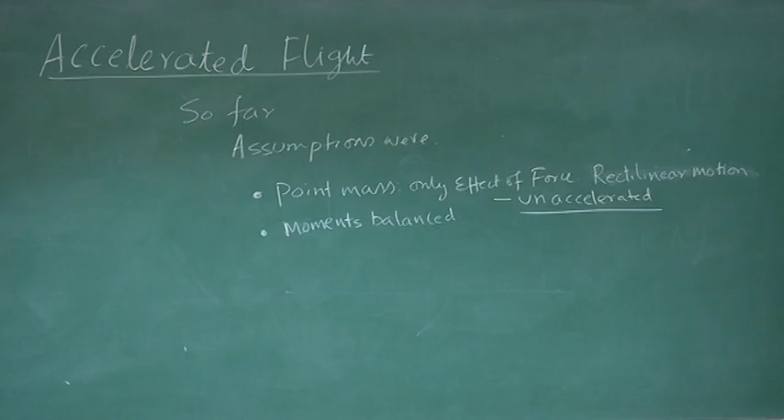Welcome back. We will be discussing now today a different type of flight regime.

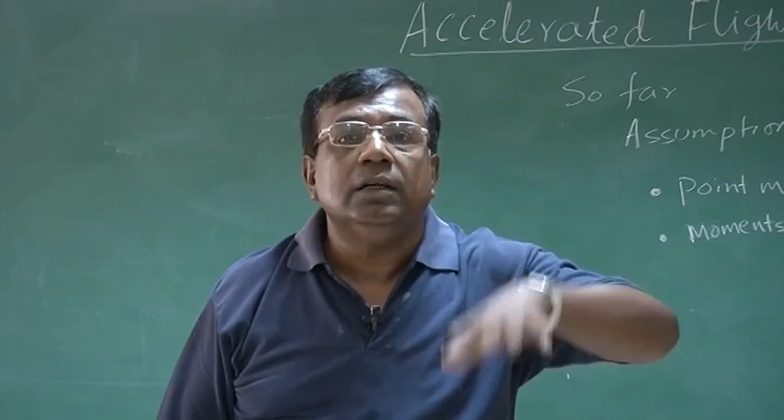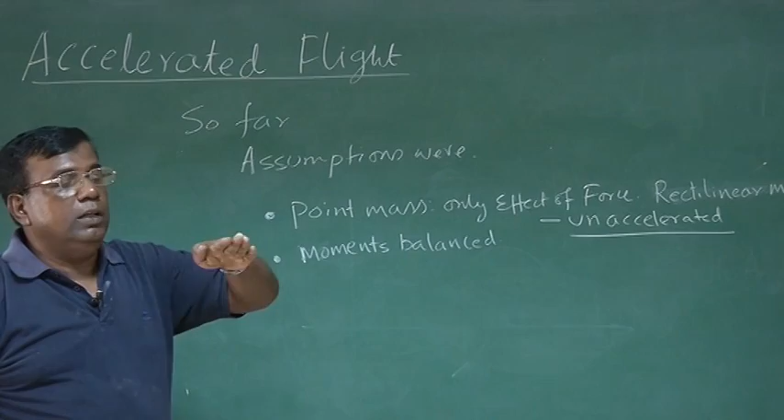So far, recall we were having assumptions. We are assuming the airplane to be a point mass. We are not bothered about the moment of inertia because we are not discussing the rotational property of the airplane. We are talking about cruise, climb, descent in rectilinear motion. We also assumed they are unaccelerated, that is, forces are balanced. There was an implicit assumption that moments are also balanced, so no such rotations are happening. In the second course you will know how moments are balanced, that's a different matter altogether. But these are the assumptions.

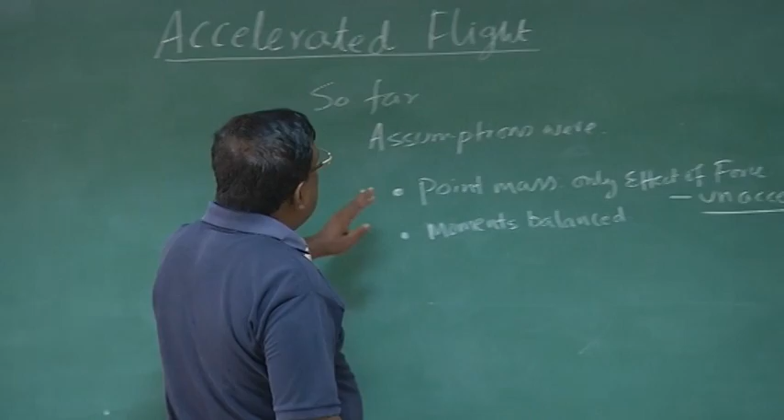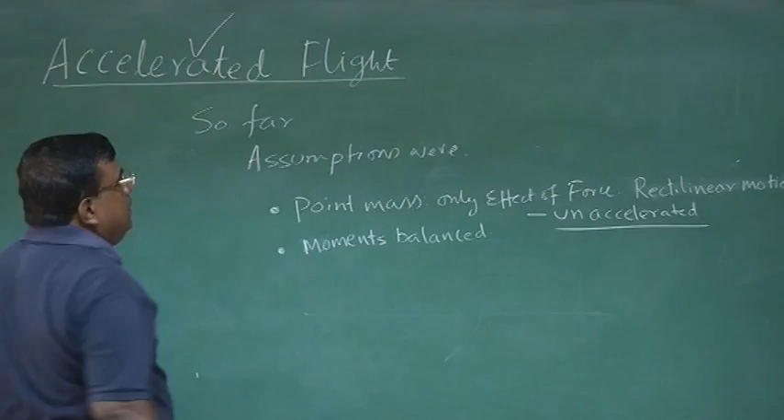Now we are going to relax one of these conditions. We still believe it will be point mass, however this time we will say it is accelerated flight. The assumption of rectilinear, unaccelerated motion is relaxed. So we will term this session under the title accelerated flight.

Whenever we think of an airplane, a young man will always think, I should be able to turn, I should roll like this. Like when you buy a motorcycle, you never think of only going straight, you think I should take a sharp turn, accelerate very fast, and that is the signature of youth. In aerospace, the adventure will always remain as long as aerospace keeps growing. This part of youth and adventure is an integral requirement to be a good aerospace engineer. So now we will talk about accelerated flight.

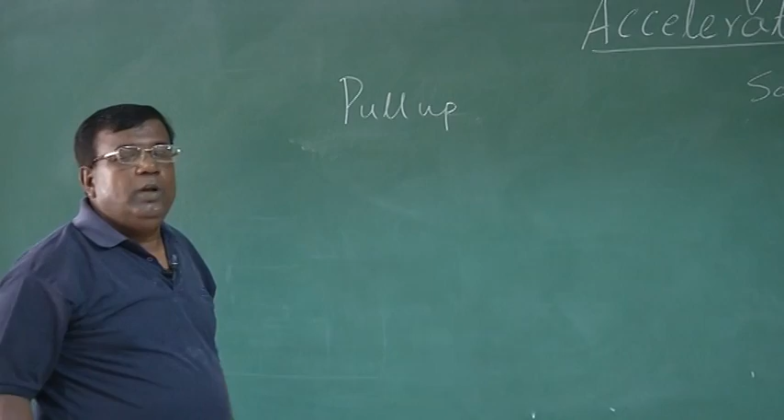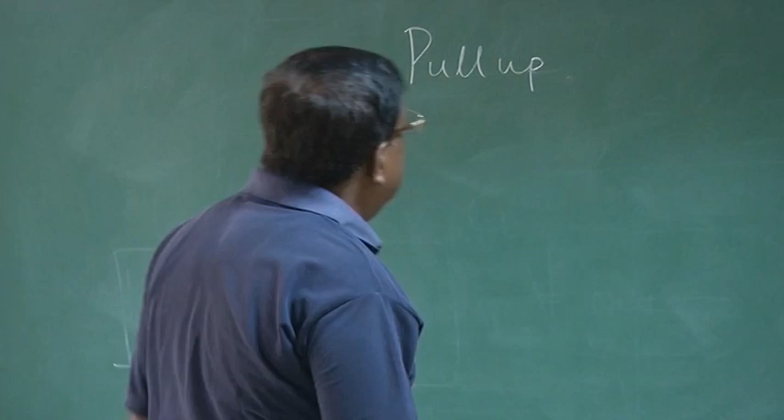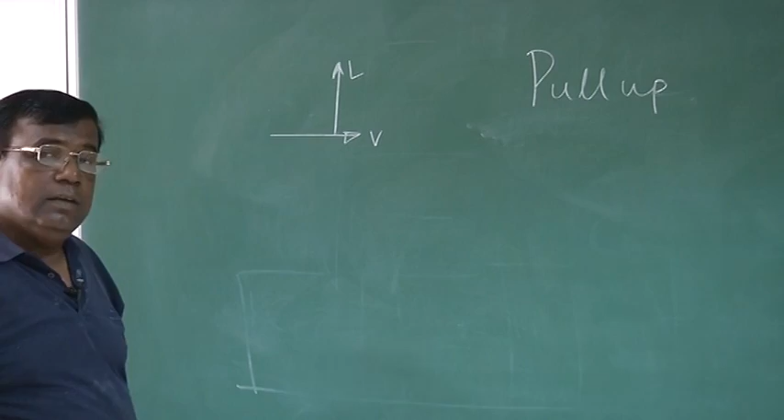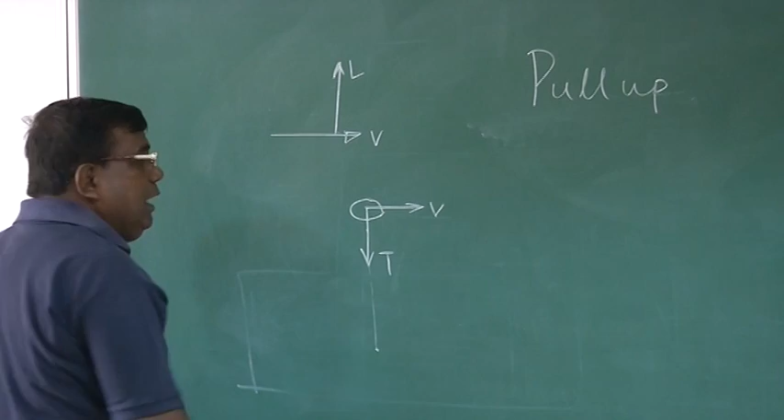Let us first discuss pull-up. What is typically a pull-up? Assume I am going like this, lift equal to weight, thrust equal to drag, and I suddenly increase the lift. What will happen? Lift is more than weight. Recall we agreed lift is perpendicular to velocity, that is how we defined lift. So if a body is moving in this direction and you pull it by a string under tension, what happens? It goes into a curved path, and this force is perpendicular to velocity.

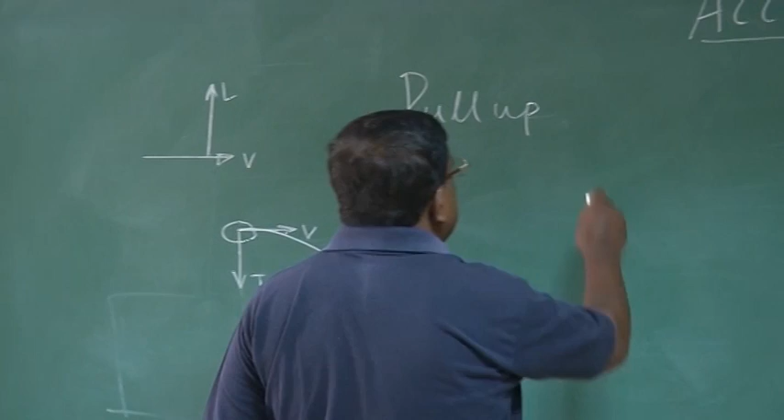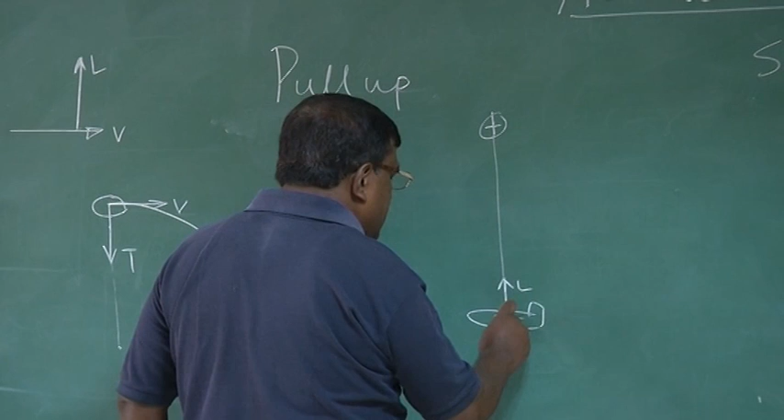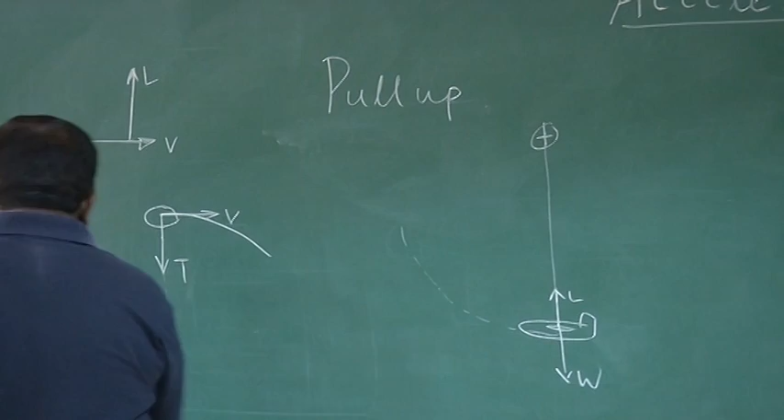This reminds you of centripetal acceleration. We will use that understanding to model a pull-up maneuver. So let me draw: this is the airplane, this is the lift, this is the weight. If you want it to go for a curved path, since it is going in a curved path, it is no more unaccelerated flight, it is accelerated flight. So if I draw this diagram and try to write the equation of motion, again assuming point mass, and of course assuming moments are balanced.

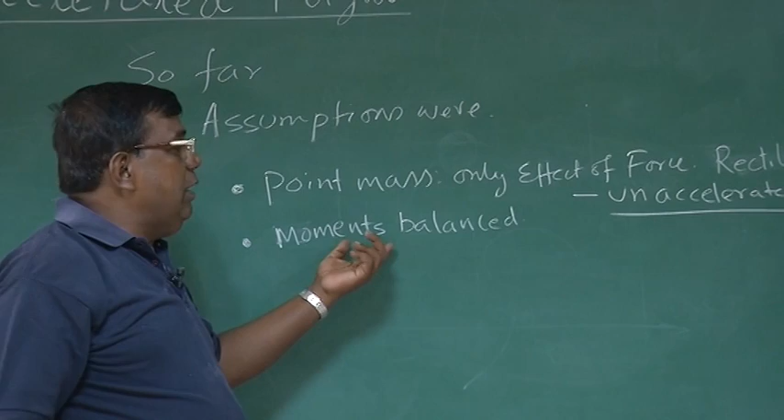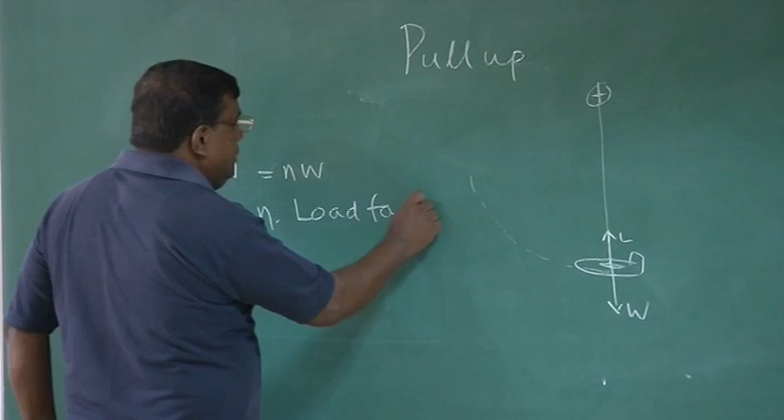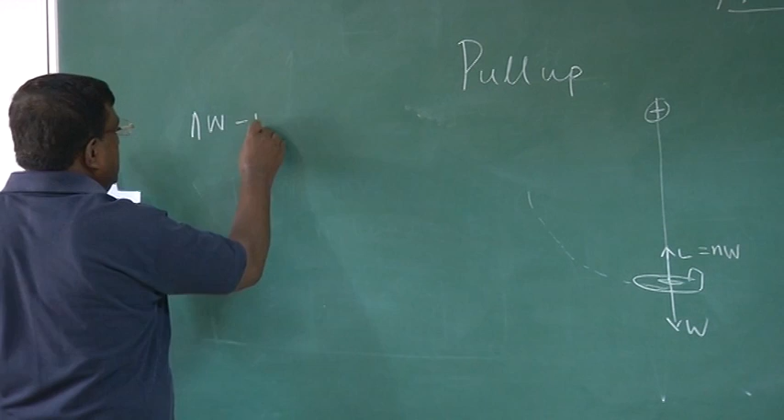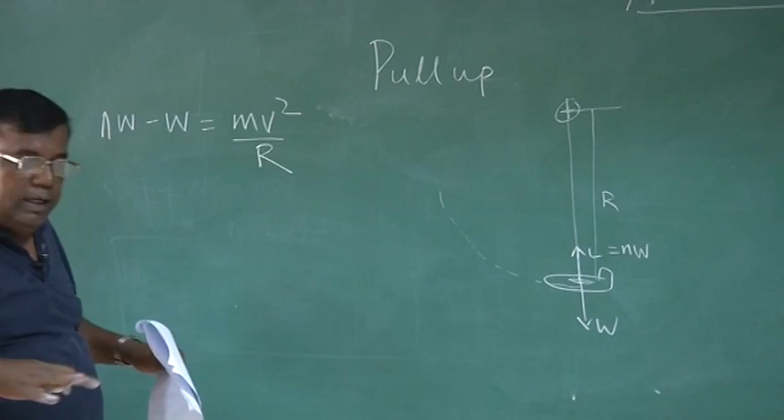So then I can write: lift, which is now not equal to weight, if it is going like this. So I write lift equal to N W, where N is the load factor, which is the ratio of lift to weight. So now lift is not equal to weight, lift equal to N W. So if I now write the equation: N W minus W will be equal to m v squared upon r, where r is the radius of turn, in a vertical plane, like this pull-up.

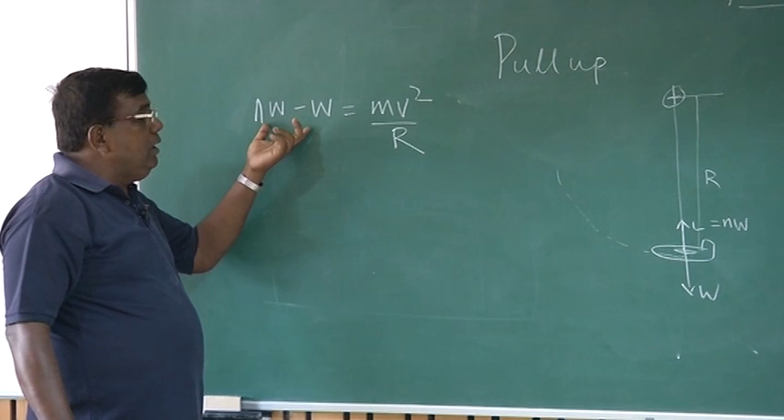So how do I understand this from class 11, 12? This is the net force perpendicular to the velocity vector. More importantly, N W is perpendicular to velocity vector. This force is responsible for giving the centripetal acceleration. Now if I do a little manipulation, I can write: n minus 1, W is equal to m v squared upon r, or r equal to v squared by g times n minus 1. This is the radius.

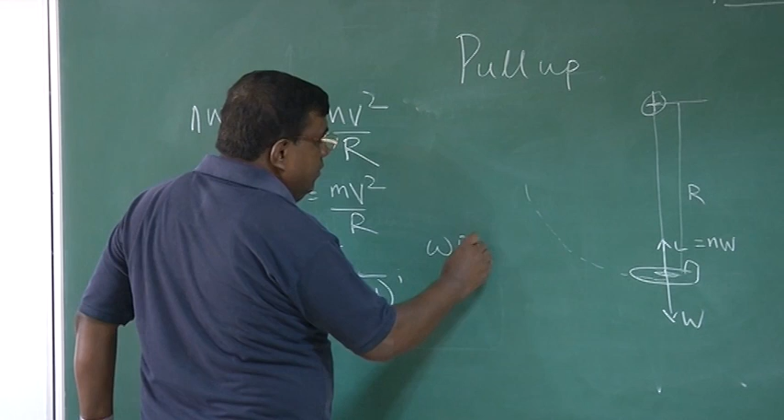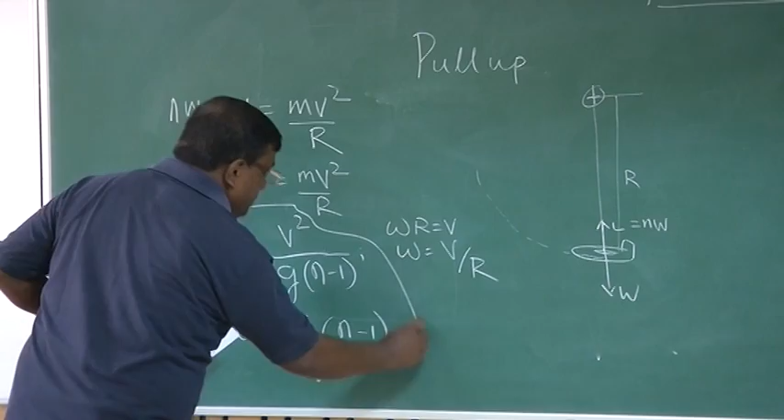And if I want to know what is the angular rate omega, using omega r equal to v, or omega equal to v by r, I can write omega is equal to g by v times n minus 1. Let me check: r equal to v squared by g times n minus 1, and omega equal to g by v times n minus 1. What is the message you are getting out of this?

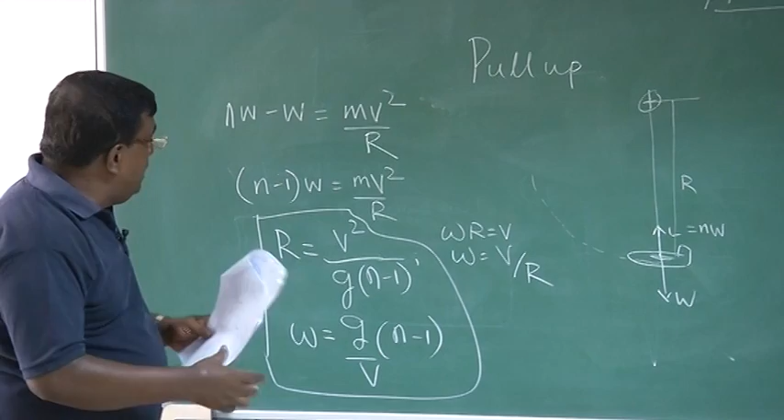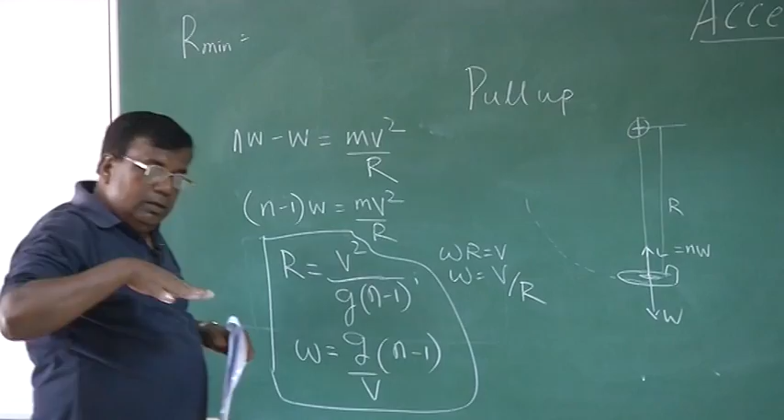Let us come back here. If you want R to be minimum, I want to turn like this, R minimum. How can I achieve R minimum? You can achieve R minimum if for a given V and given G, N is maximum. What is the meaning of N maximum? That is, you have a high load factor. How do you get a high load factor? You should have very effective wing loading, very effective lift distribution on the wing. So all these things get coupled when I think in terms of R minimum. R minimum is N maximum.

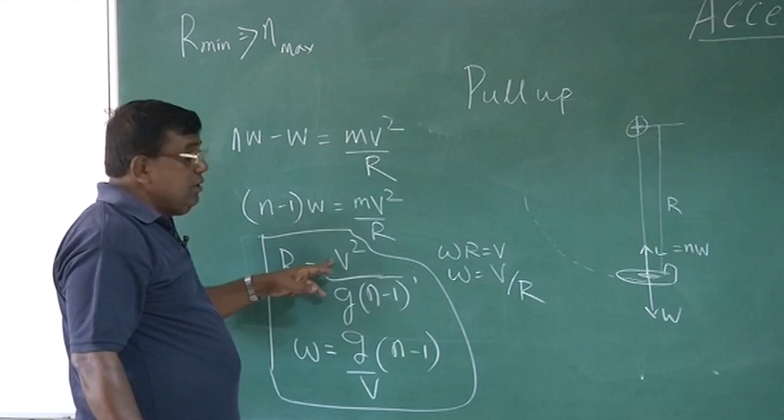Similarly, for a larger angular rate, again for a given V, N has to be large, which by physics is fantastic, because unless you have the lift, who will do the pull-up? It's the lift only. At the same time, you could see R is also dependent on V, and omega is also inversely dependent on V. This is also an observation you must have. There is another maneuver called pull-down maneuver.

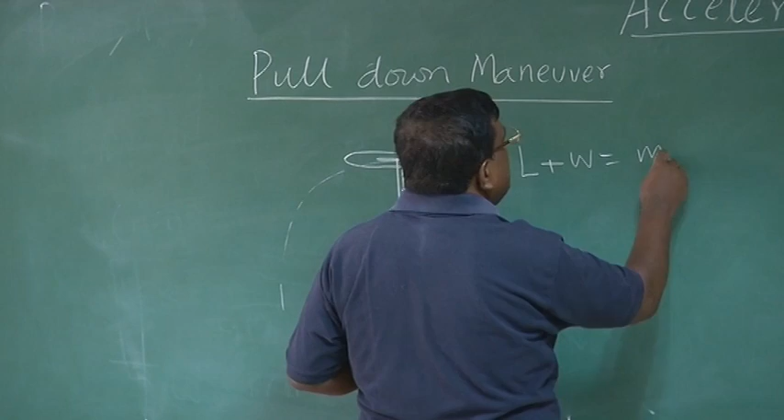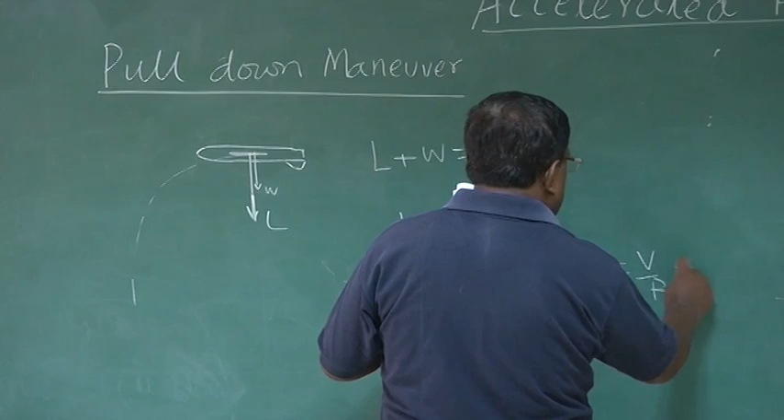Where I can, it's like inverted flight. Here the lift acts downward and also the weight is acting, and it is going in a circle in a vertical plane. If I write the same equation, L plus W will be responsible for giving centripetal acceleration, and I know L equals N W. By manipulating these two equations, I can write R equal to V square by G into n plus 1, and omega is equal to V by R, that is equal to G n plus 1 by V.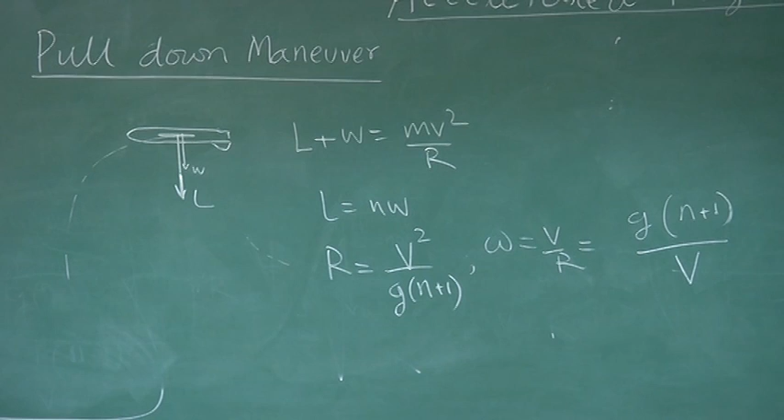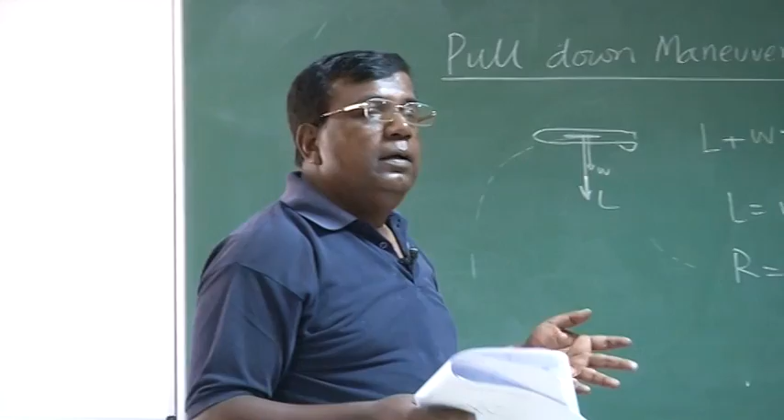Here also you could see if I want R minimum, then N has to be maximum for a given speed. If I want omega to be very high, N has to be maximum. This is true because if I want a very sharp turn, it is the lift that does all these things, and if lift is more, then the load factor is more. So it is consistent with our understanding of how that whole mechanics is going about.

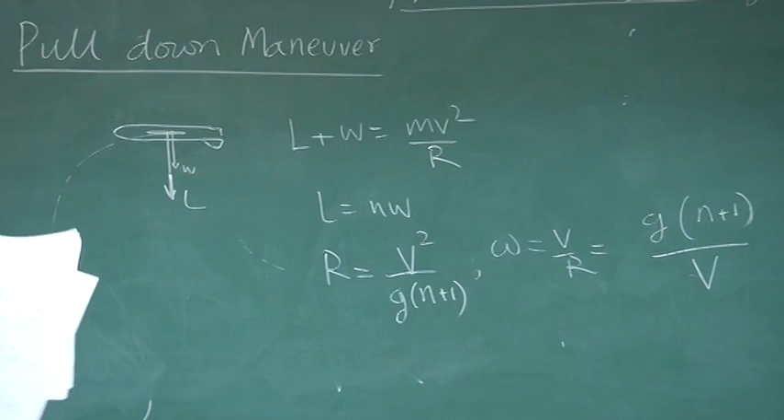Now think of the airplane flying like this, and it wants to turn in a horizontal circle. That means I need a force which should be towards the center of the circle. So where do I get this force from? If the wing is like this, I don't get it, because lift is like this. But if I bank this airplane, then the lift is now inclined, and one component, the horizontal component, will be responsible for giving me a circle in the horizontal plane.

I repeat, if I am flying like this, this is the lift. If I want to take a circular turn in a horizontal plane, I need a force in this direction. So what I do is bank the airplane. The moment I bank it, this horizontal component will be responsible for giving a force in this direction, and because of that I will be taking a circular turn, or what we call turning flight. If this is understood, the modeling becomes simple.

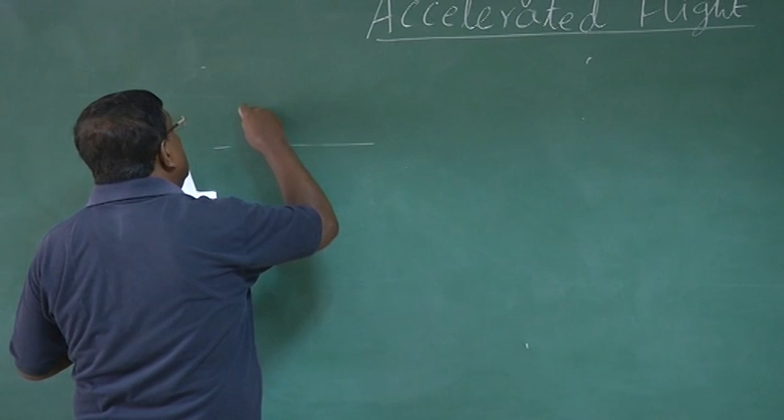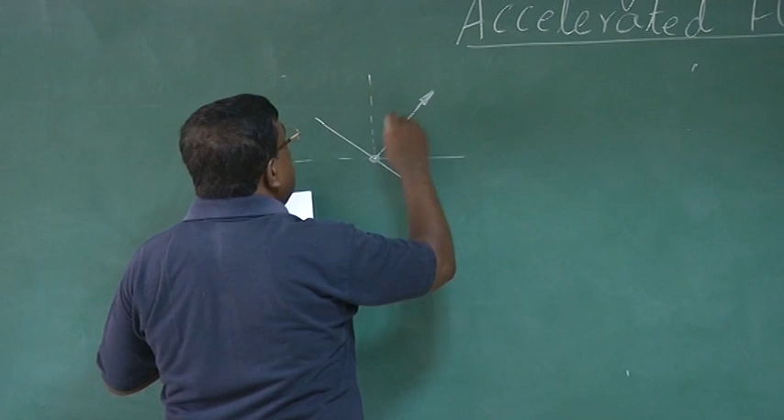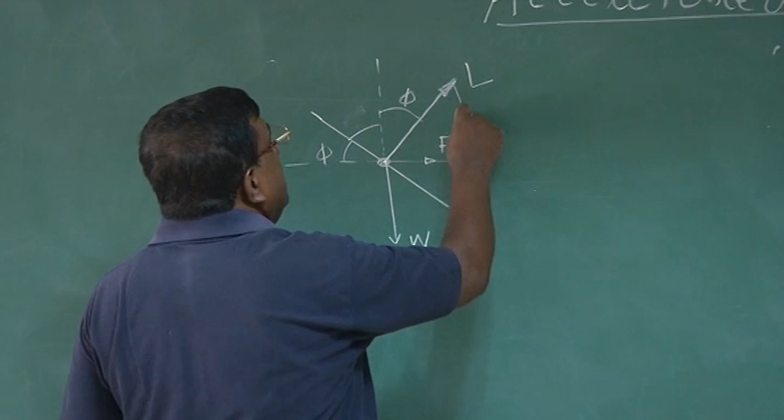Let me draw it. See, we have banked the airplane by angle phi. This is the lift, this is the weight, this is again phi, and this I call Fr, that horizontal force which will be responsible for giving me motion in the horizontal plane, a circular or curved motion.

So now from this force diagram I can write L cos phi equal to W, and Fr equal to under root of L square minus W square. From this triangle, you see, this is the lift, this is the Fr, this is the weight. So I can resolve the weight along this, so I can write this simply.

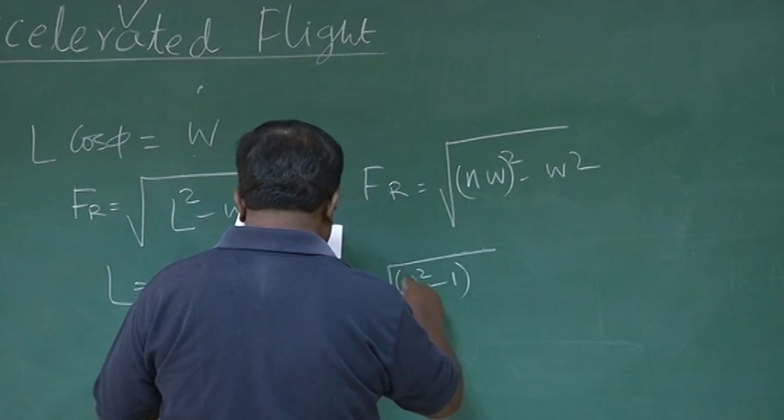Once I write that, now again I know lift equals N W, the load factor. So I can write Fr as under root of N square W square minus W square. After doing some manipulation, I can write W under root N square minus 1 is equal to M V square upon R, because this Fr is only giving me the centripetal acceleration. So I will write this Fr equal to m v square upon r.

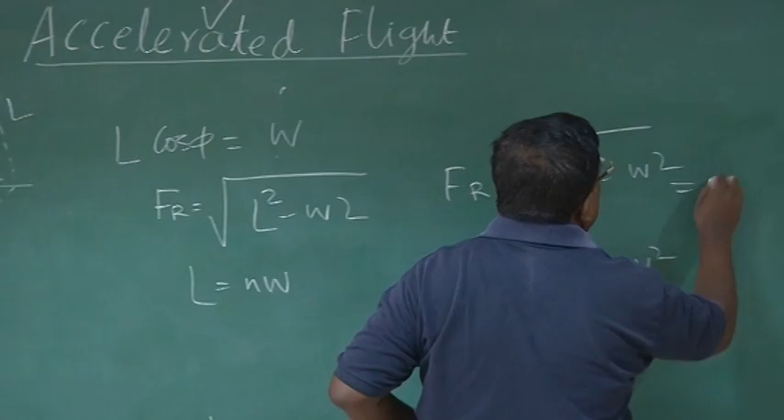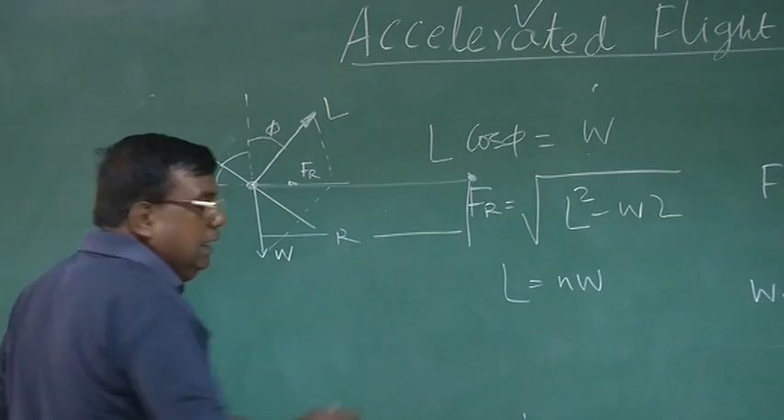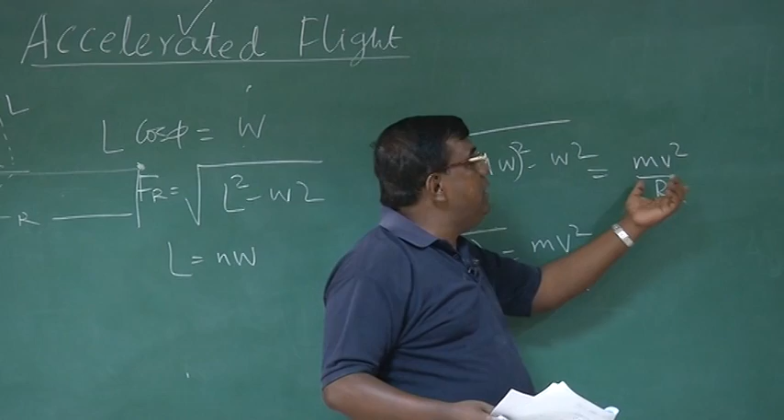What is this r? R is the radius of turn in the horizontal plane. That is, if I am turning like this, that is the radius of turn. And what is this Fr? Fr is the horizontal component which gives me enough force so that I have the requisite centripetal acceleration to ensure a horizontal turn.

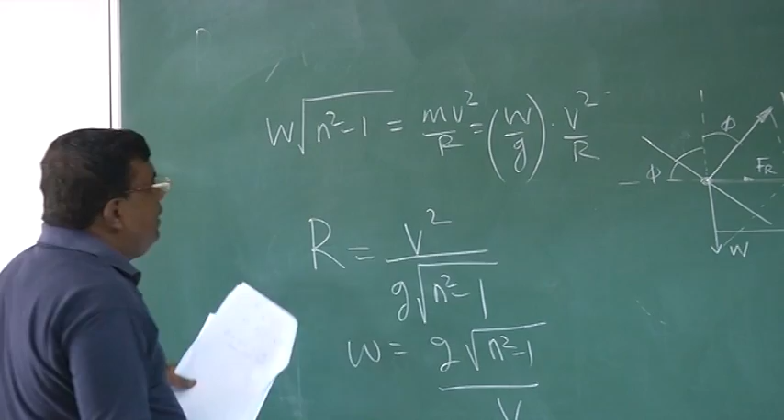Now, if I write m v square upon r, for m, for completion I write m as W by g into v square upon r. And if I do a little adjustment, I can find an expression for r as v square by g under root N square minus 1, and omega as g under root N square minus 1 by v.

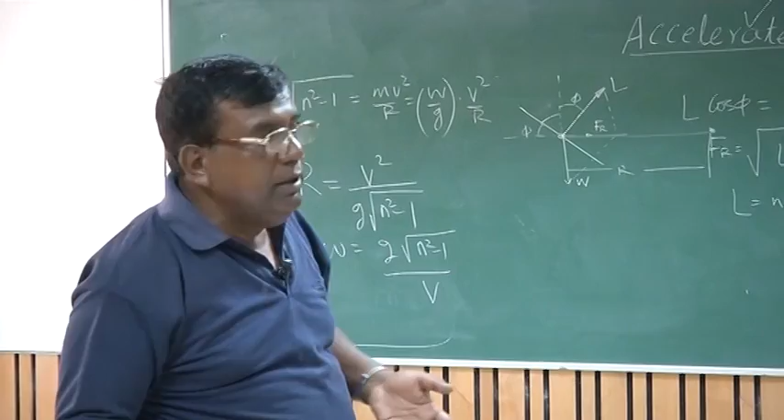So again you see that if I want the radius to be small or minimum for a turning flight, I need N to be large, which is fair enough, because after all N is nothing but lift divided by weight. N large means lift is more than weight, and lift is doing all this activity, so we are happy about it. Do not forget here, some component of weight is also coming into this case. The Fr, if you see, is under root of L square minus W square.

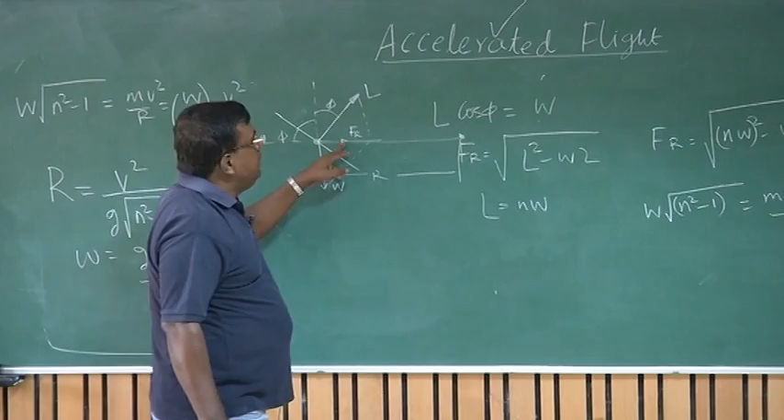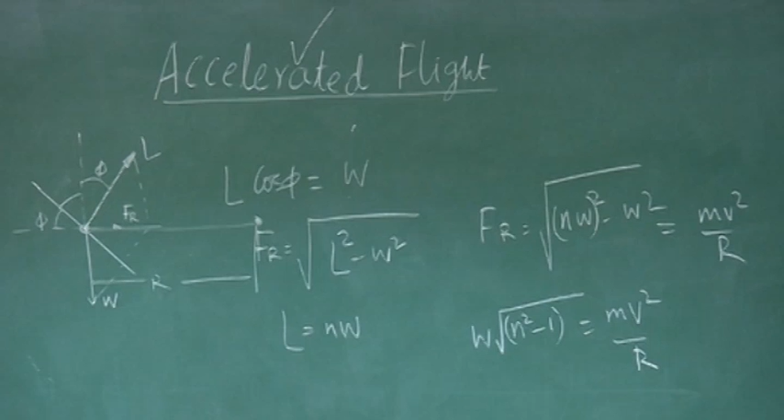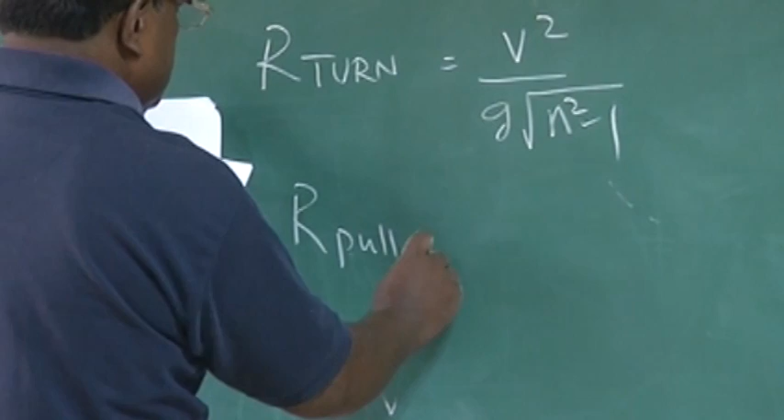So let us summarize and try to get a generic feeling about this turning flight. We have seen R for pull-up as V square by g n minus 1. We have seen R for turning flight as V square by G under root n square minus 1, and R for pull down as V square by G n plus 1.

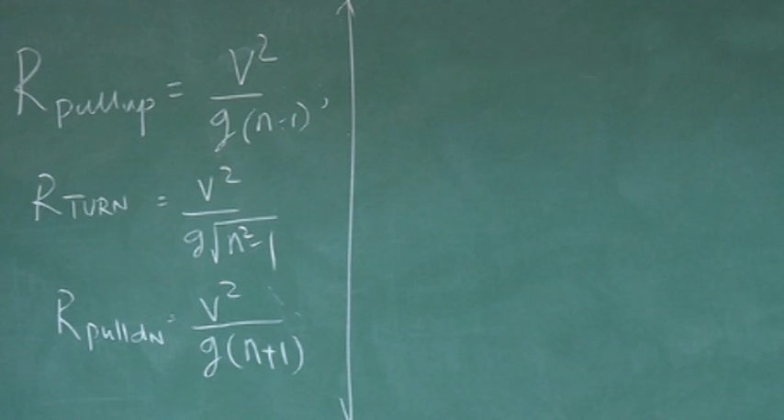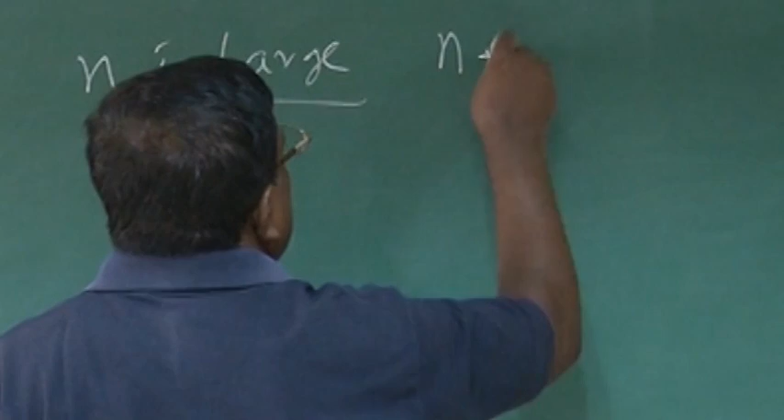Now think of a situation. Let's say n is large. When you talk about accelerated flight, our aim is always to go higher n. Otherwise why do you want accelerated flight? A natural tendency, I should fly at a higher load factor. Suppose n is large, and we do an approximation, n plus 1 approximately equal to n minus 1 equal to n. Or to be more precise, I can write root of n square minus 1. So this is an approximation that n is large. For example, if n is 6, then 1 is neglected compared to 6.

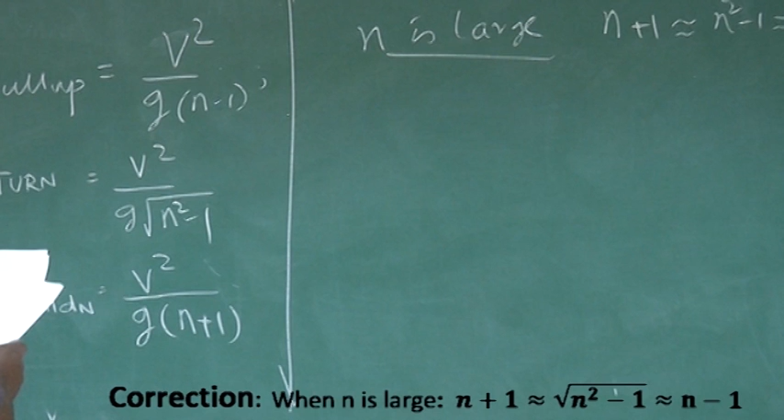Just to get an idea about some very important understanding for a designer, because all these things are from the mechanics. But the designer should translate this to the configuration of an airplane, which should be capable of generating requisite forces to achieve all these performance parameters. So if I apply this approximation here, I get R pull up

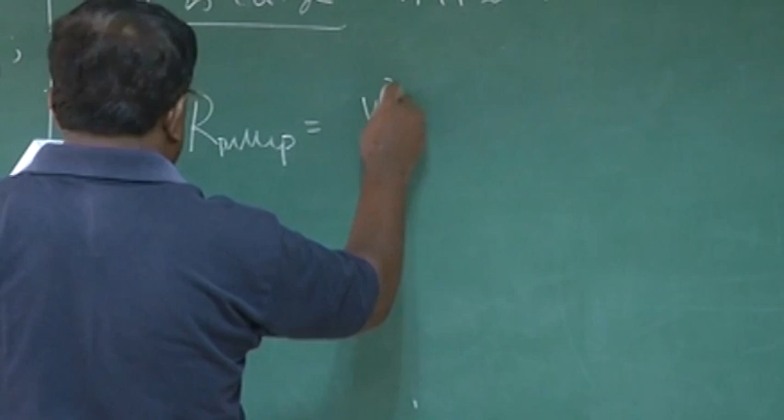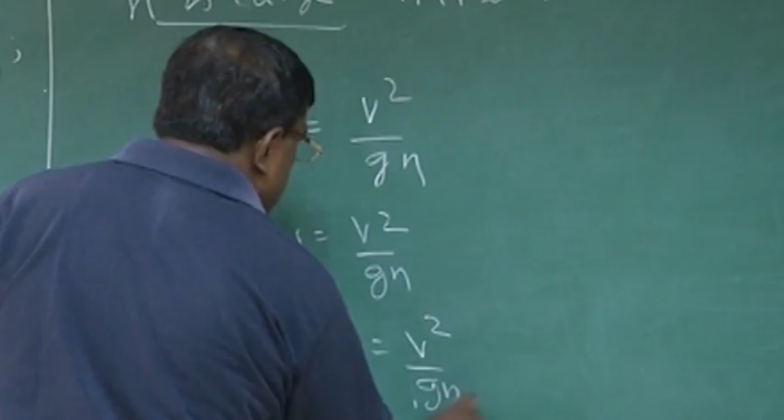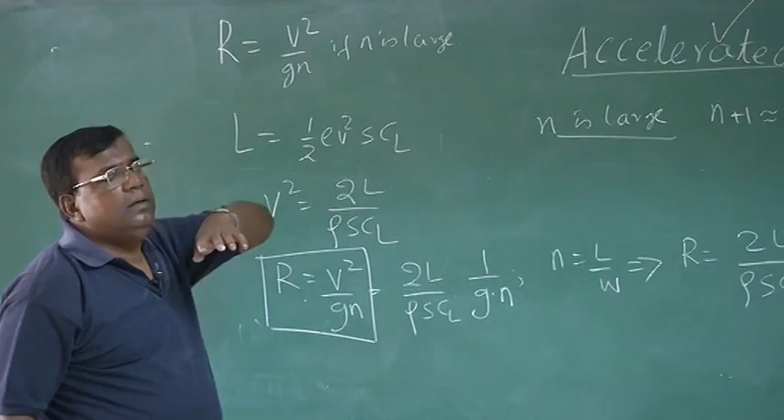is equal to V square by Gn. Again, R turn also I get as V square by Gn, and R pull down also I get as V square by Gn. So we have seen that if n is large, then I can express R as V square by Gn, whether it is a pull up, pull down, or a turning flight. Similarly, you can show omega equal to Gn by V.

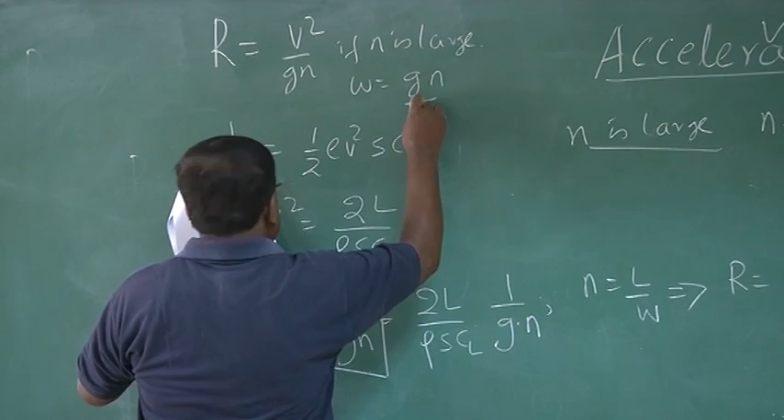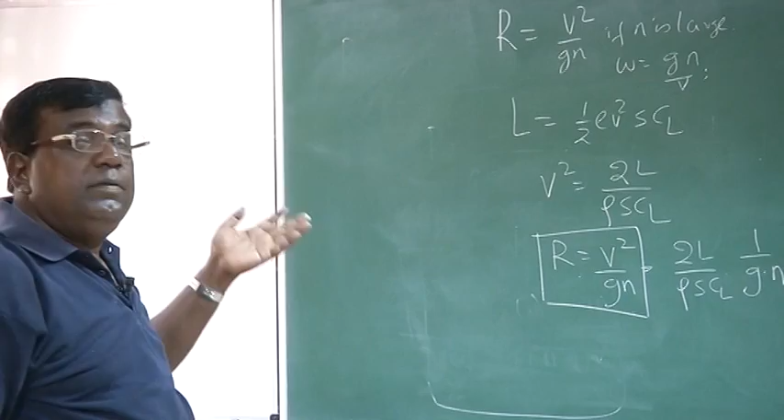Now we want to extract some information for a designer. That is, the important question is, if I want to make an aircraft which is capable of generating radius of turn, let's say R1, some value, then I must ensure that the design layout is such. And design layout of what? Design layout of primarily the wing, because wing is giving this force. So how do I connect one of the wing's important properties like wing loading with this R or omega, angular rate? That is our aim. And keep this in mind, R equal to V square by Gn if n is large.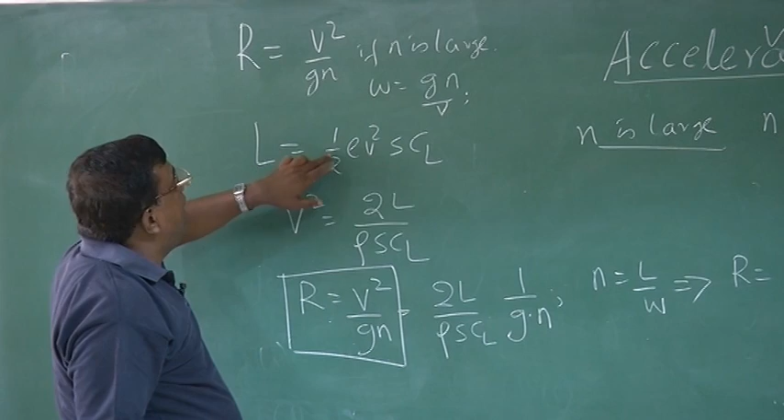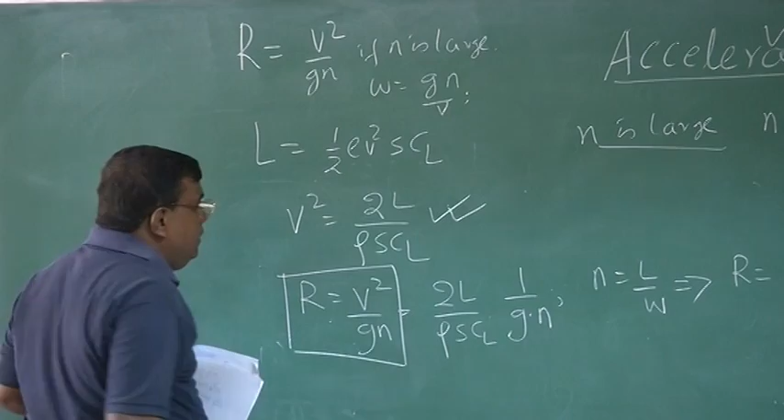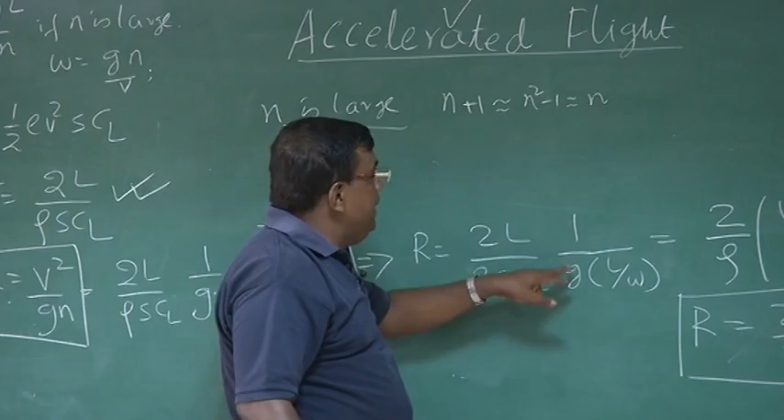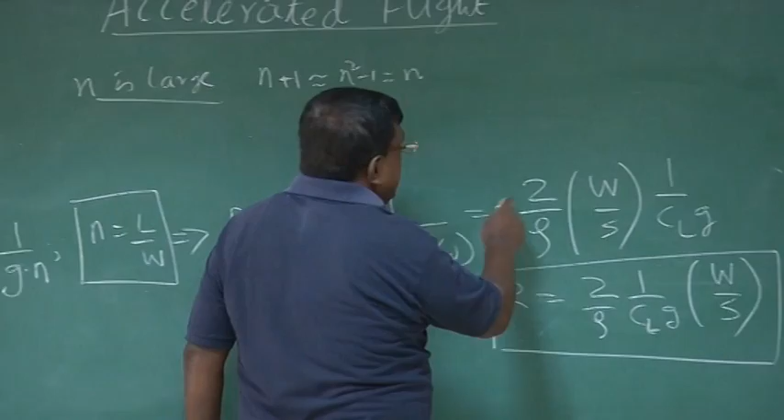What we are doing? First we are writing L as nothing but half rho V square S CL. From there I am getting the expression of V square. V square will be 2L by rho S CL. No issues. Now since R equal to V square by Gn, I substitute V square by this expression. For V square I will get 2L by rho S CL, and Gn is here, G into n, where n is the load factor. What is n? It is a load factor, so n equal to L by W. So I will be replacing n by L by W in the next expression. You see, 2L rho SCL 1 by G. Instead of n, I am writing L by W. After that, I realize this L gets cancelled and W comes on the numerator. So I can simplify this expression as 2 by rho, W by S, 1 by CL into G.

Or the final expression comes, radius as 2 by rho, 1 by CL, G, into W by S. As I was telling you, after all, this force is coming because of the wing, and the important property of the wing in relation to lifting characteristics is wing loading. Because if wing loading is small, that means it has a large wing area. So now see here, our aim is to get R minimum.

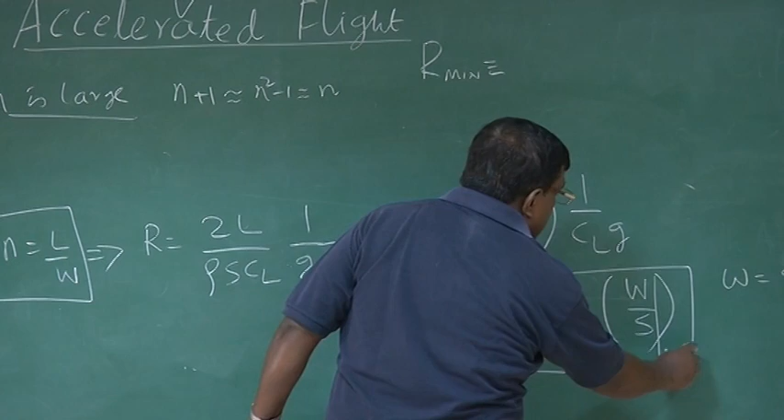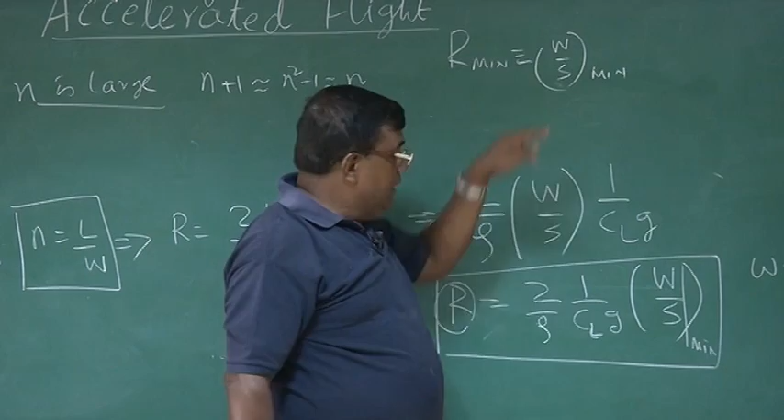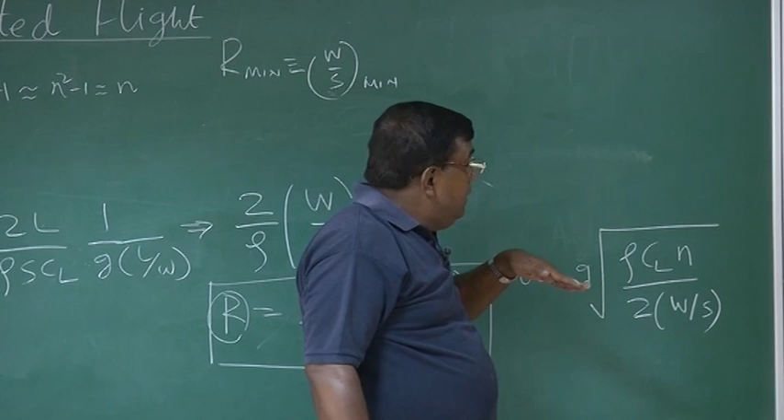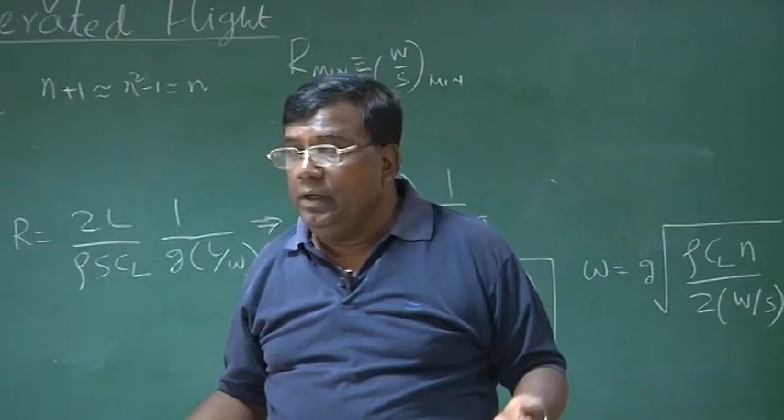And what does it say? For R minimum, I must also ensure W by S is minimum, keeping other things constant. Or it also tells that if I want a particular R, what should be W by S? Or if you want a particular angular rate, what will be W by S? Please also realize here, if I want larger angular rate, very fast turning, again it says the wing loading should be very, very low. That means larger wing area means more lift and very consistent. So it's a simple manipulation, rearrangement of whatever we have learned, and with some realistic approximation, how wonderful results we get, which are so useful for a designer.

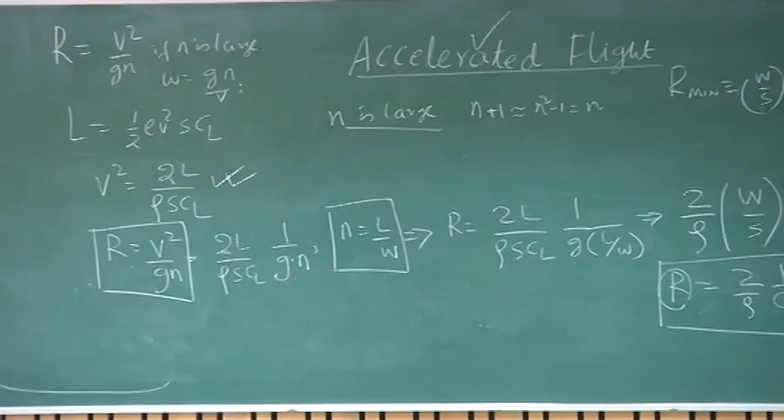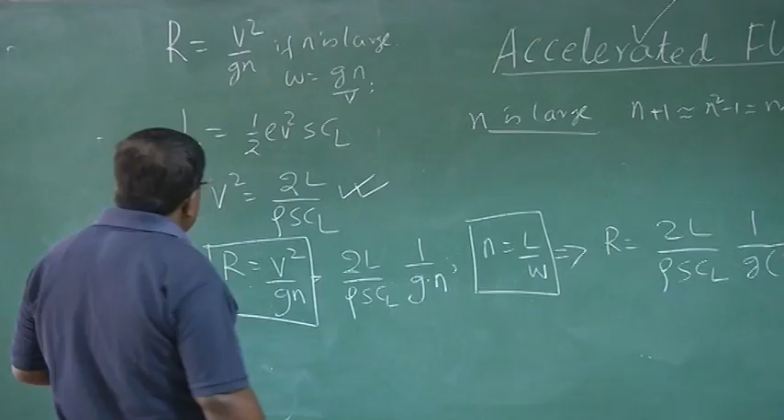Clear? That is the purpose of this course. That whatever performance we are talking about, finally we'll ask a question, am I in a position to give the designer the right insight in terms of laying out his component? So here at least one thing we have done and understood for ourselves, that if I want a particular radius or particular omega, what should be my wing loading?

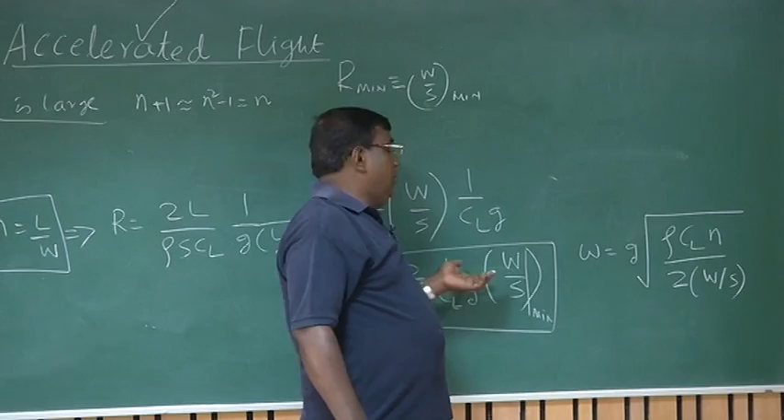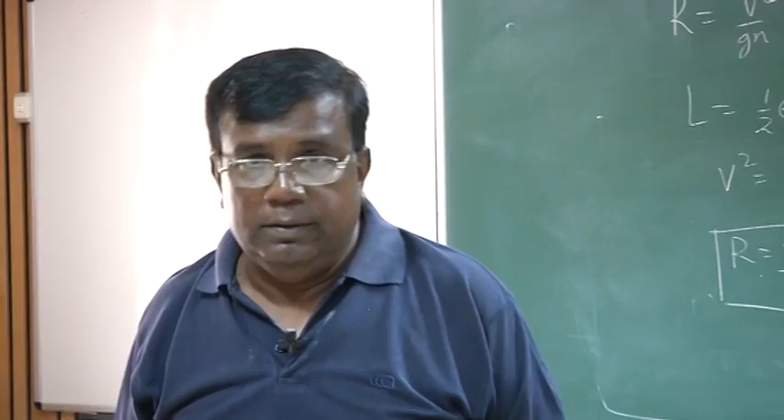Please understand, when you select the wing loading, it may be selected because of many other criteria, because of range, because of cruise mission, because of climb mission. There are so many requirements that will come. But as a good designer, we need to know for every mission what is the wing loading required, and finally you freeze a wing loading which tries to satisfy most of them, most of the mission requirements, in a weighted manner. Like if you are designing a transport airplane, then you give more weightage for wing loading for cruise performance. Like that you have to be smart enough to get an optimal configuration.